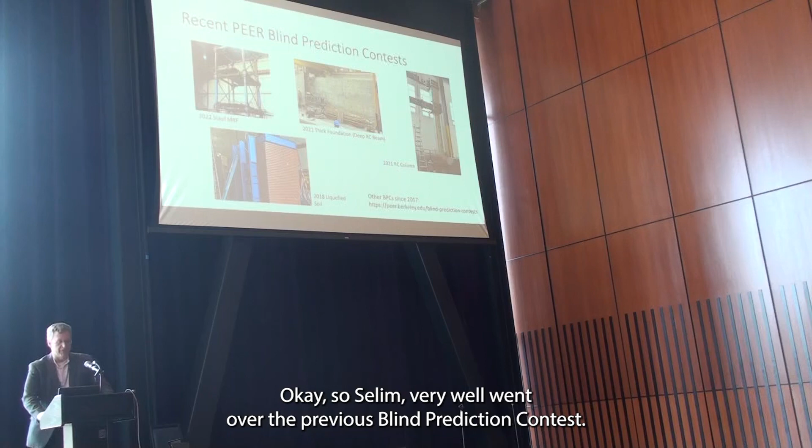But do a blind prediction contest for wave loading on a steel frame structure. Okay, so Selim very well went over the previous blind prediction contests. I don't need to reiterate those, but PEER has a long history of these types of contests.

But also in 2014, PEER held a tsunami modeling workshop at OSU, not as a blind prediction, but as just, here's some data from some experiments, how well can we use current methods to predict wave loading on a bridge deck. And this is from tests conducted in Japan at PWRI, and was part of PEER's tsunami research program. Okay, so all the participants are there, a lot of familiar faces, might be kind of hard to see.

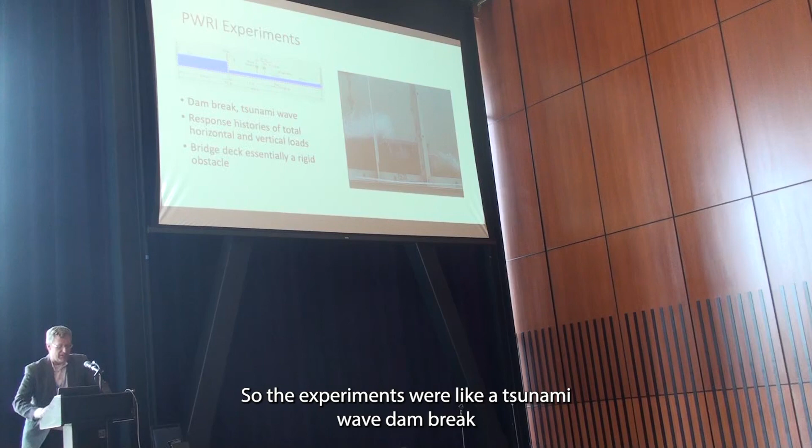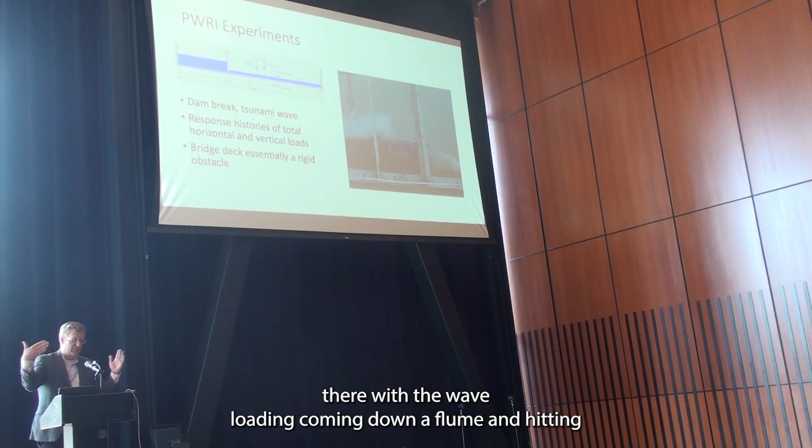Okay, so the experiments were like a tsunami wave dam break onto a 1 to 20 scale model of a bridge deck. Again, might be a little hard to see, but that's from the experiments there with wave loading, coming down a flume, and hitting a bridge deck. Okay, but the bridge deck was essentially a rigid obstacle. So it was all CFD. We asked people to determine the response histories of total horizontal and total vertical loads acting on the bridge deck.

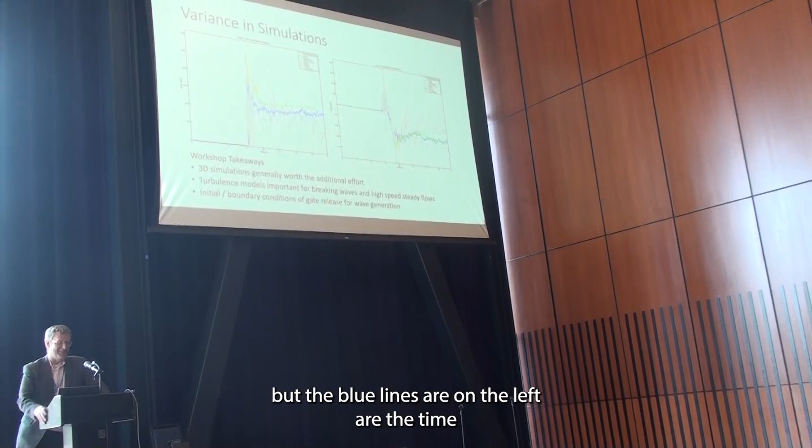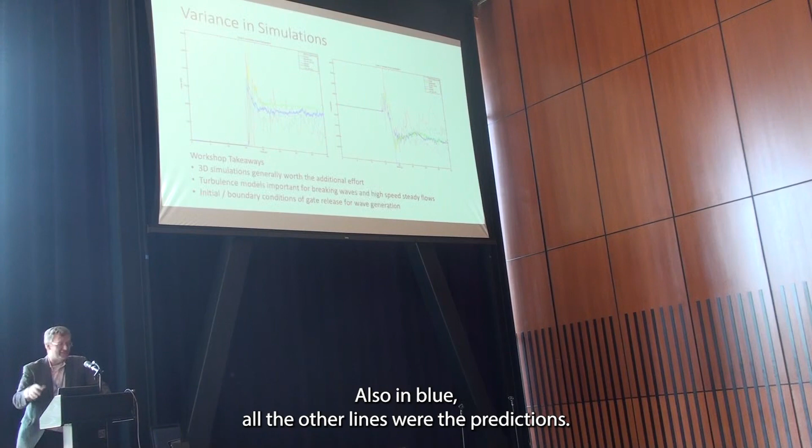Okay, and again, maybe a little hard to see, but the blue lines on the left are the time histories of total horizontal force from the experiment, and on the right is the total vertical force from the experiment, also in blue. All the other lines were the predictions. All right. And there were various softwares used. I know you can't read that. I can barely read it on this screen.

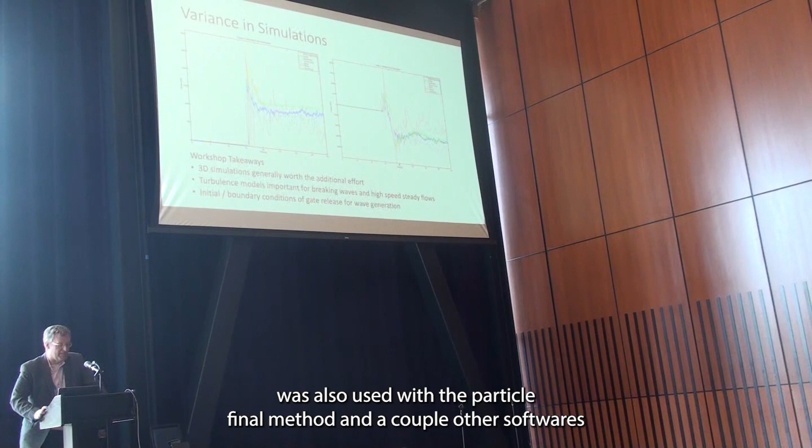But from what I remember, there's LS-DYNA, OpenFOAM, a couple of entries with OpenFOAM, STAR-CCM, OpenSees was also used with the particle finite element method, and a couple other softwares that I forget and I can't read on the screen there.

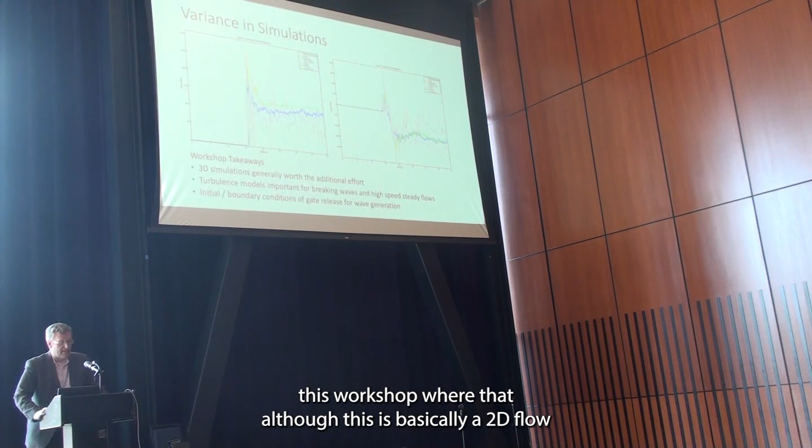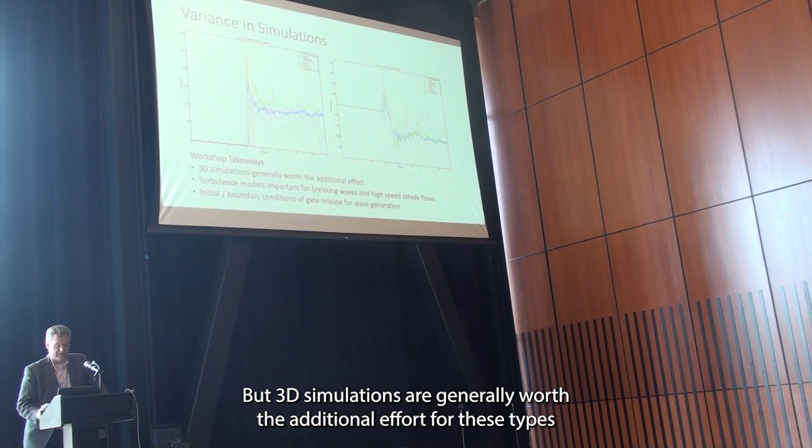Okay, Selim went over some of the takeaways from previous blind prediction contests, but some of the takeaways from this workshop were that, although this was basically a 2D flow, or 1D flow, 2D model, however you want to define it, 3D simulations are generally worth the additional effort for these types of wave loading problems. Even though they seem to be inherently 2D, there's some localized flow and turbulence that 3D can capture.

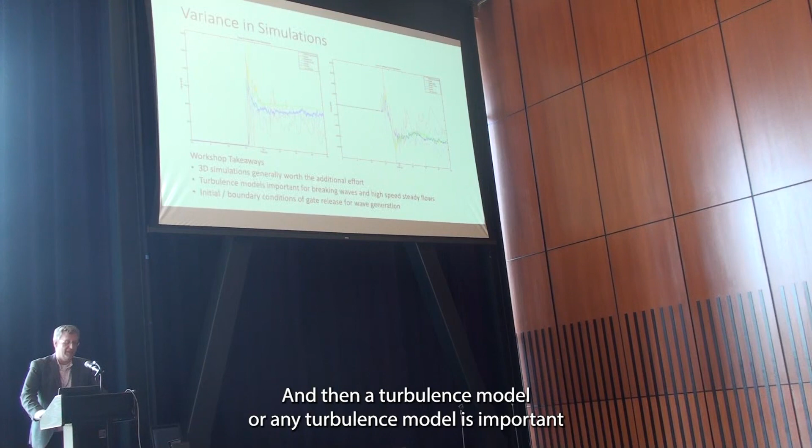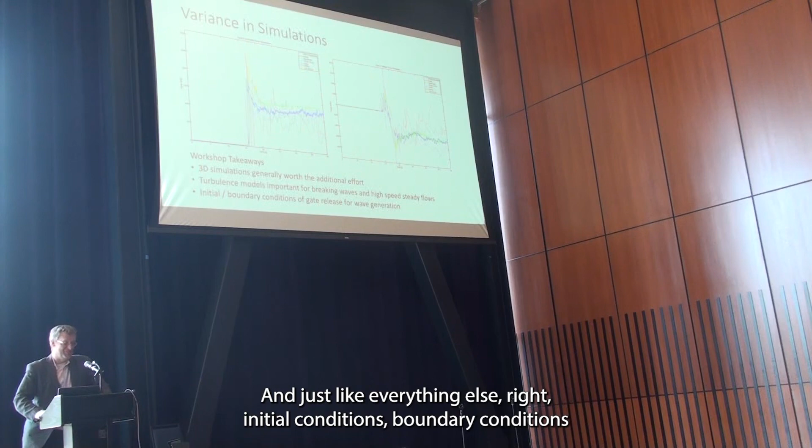And then a turbulence model, or any turbulence model, was important for breaking waves and high-speed, steady flows. And just like everything else, initial conditions, boundary conditions of the gate release or the wave generation were very important. That's like every simulation, right? It's the initial and boundary conditions, right?

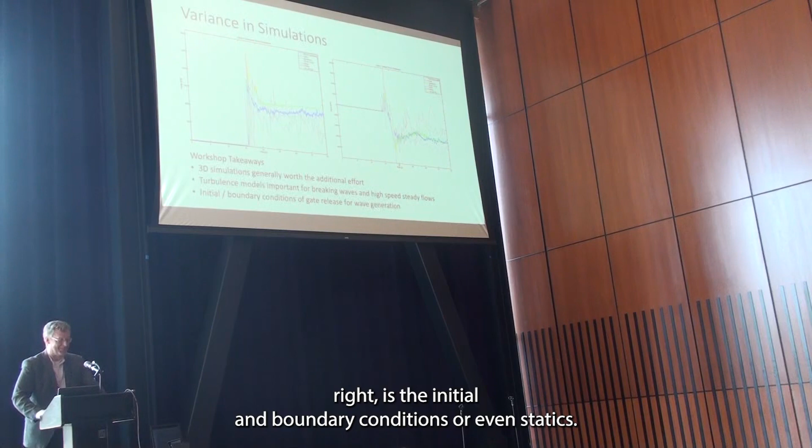Even statics, right? Okay, so fast forward, well, actually 1 year later, some steel frame experiments were conducted at OSU in the large wave flume, which Pedro Lomonaco will talk about tomorrow morning. You'll get more information, so I won't describe that today. But these are tests conducted by Dan Borello, who was at OSU at the time. He's since left OSU, doing pretty well. But he and Nick Wertheim conducted these tests with Pedro in the large wave flume.

It was a flexible steel frame model, and the objectives were to measure the dynamic properties of flexible inundated structures, and also measure the forced response of flexible structures to various wave conditions. Okay, and this will form the basis for the blind prediction contest that I'm proposing here. I don't have all the details worked out, so it's a little bit like when I teach structural design, the blind leading the blind, but also the blind telling you what the blind prediction is going to be. But I'll get the details worked out.

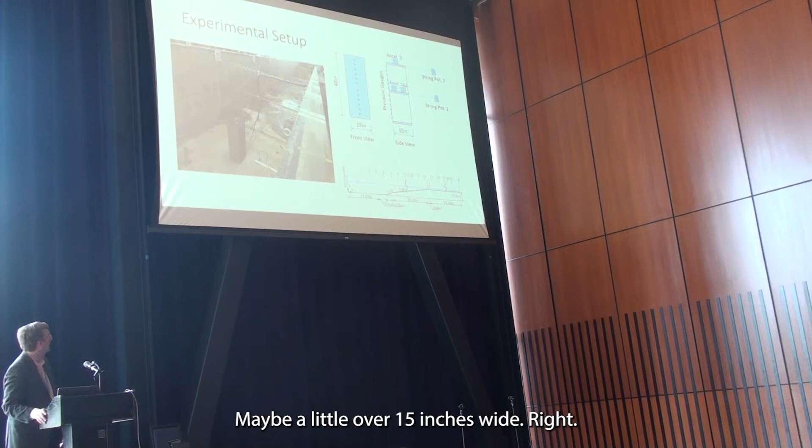But anyway, again, maybe kind of hard to see, but imagine this podium. It's about 4 feet tall, right? Maybe a little over 15 inches wide. But let's see. This pointer, no. Anyway, okay. Sorry. I'm going to blame this on the Mac, not user error, right? But anyway,

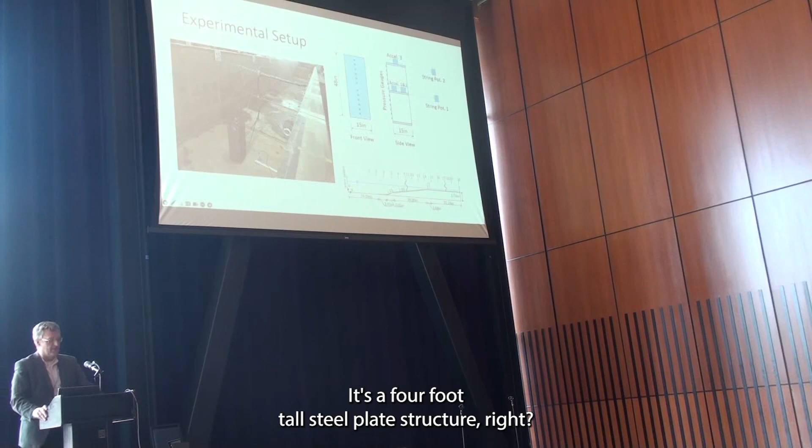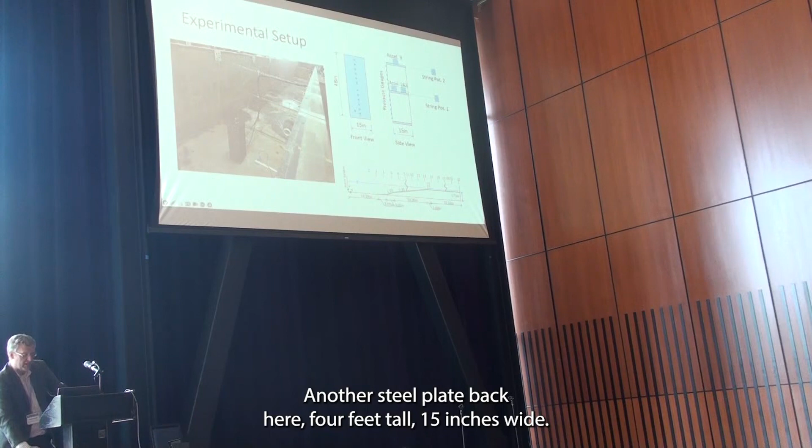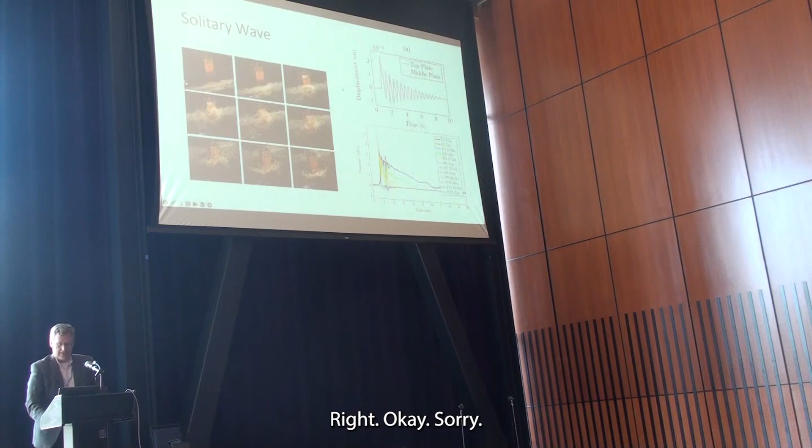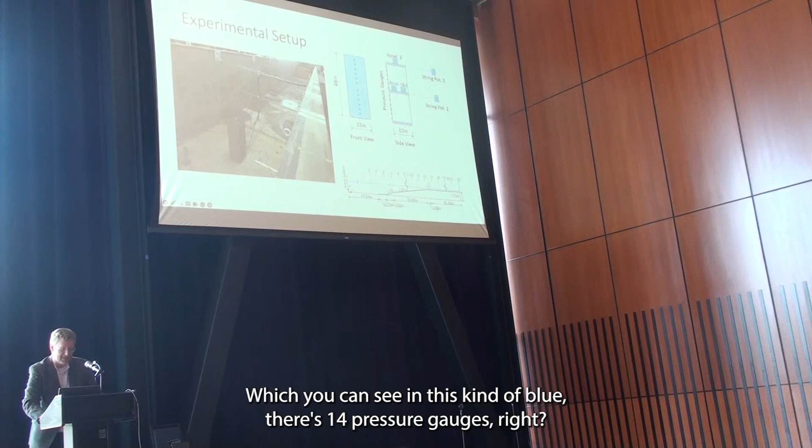Okay, so there's pressure gauges all along the front here, which you can see in this blue. There's 14 pressure gauges. And then from the side, there's accelerometers here to measure the dynamic response of each floor. And I believe there's some added mass, but it's not a big deal for this discussion.

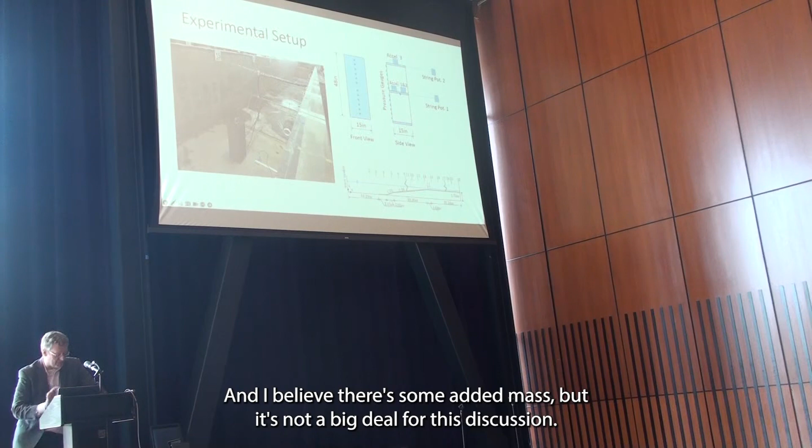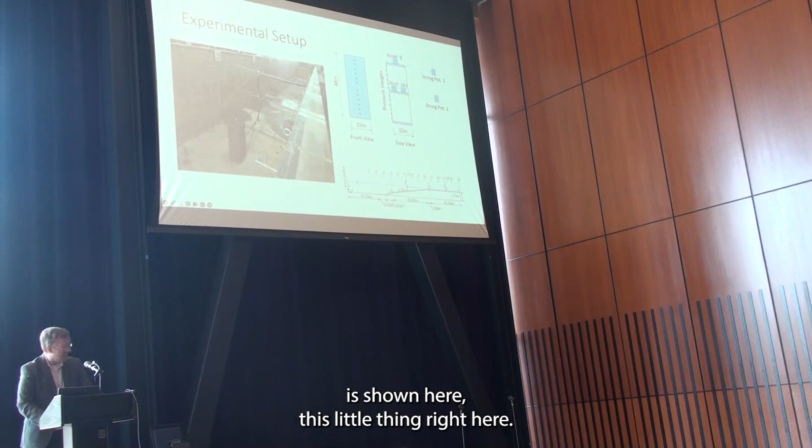Okay, so the profile of the large wave flume at OSU is shown here. This little thing right here, that's the frame. Everything else is fluid and beach.

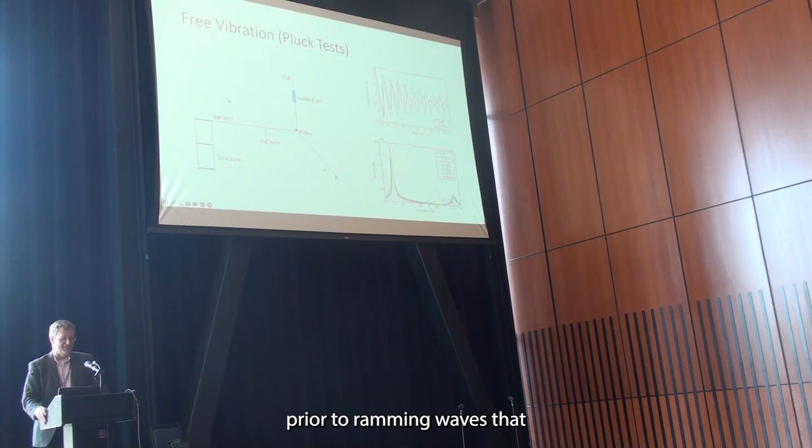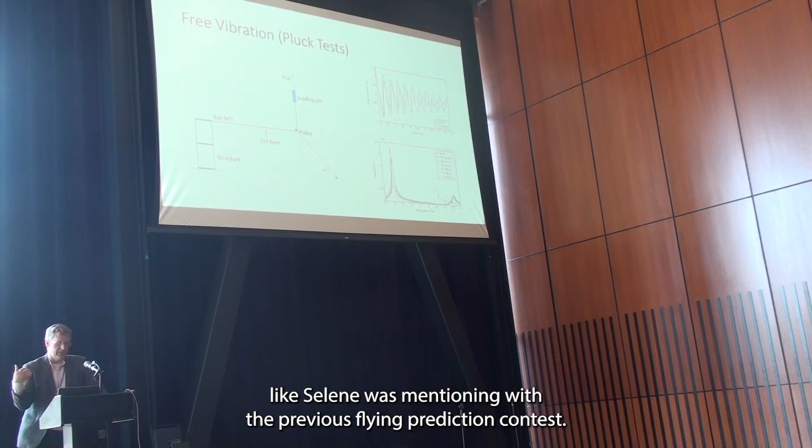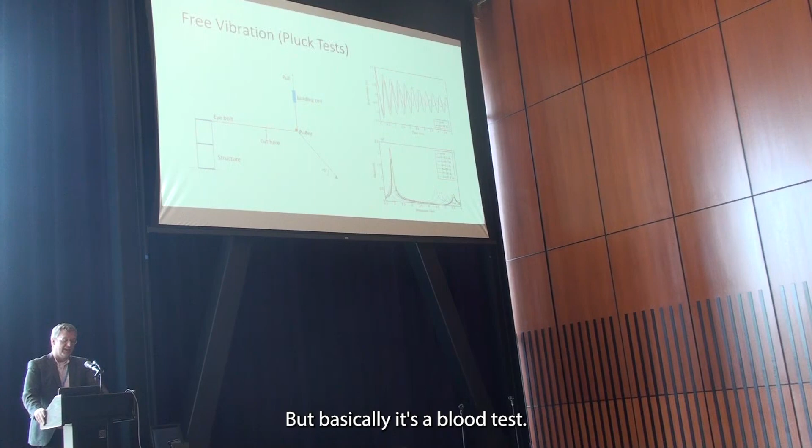What was done prior to running waves at this structure was free vibration tests. And we're going to give this data to the contestants so you can calibrate your models, just like Salim was mentioning with the previous blind prediction contest. So don't be trying to snap pictures of the time history to get a leg up in the competition, right? We're going to give you this data. But basically it's a pluck test. Again, statics problem, right?

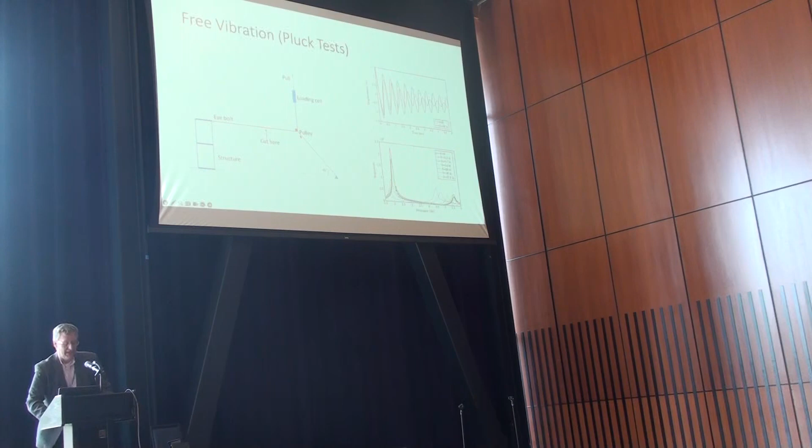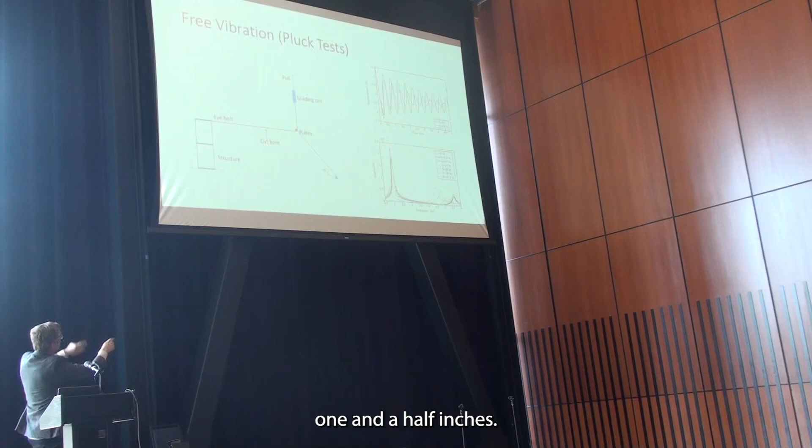That becomes a dynamics problem, but a pulley right here, and then a pin, classic Hibbeler, right? Okay, so basically, pull on the frame, get the frame to displace 1.5 inches, and then cut, and then let the thing vibrate, right?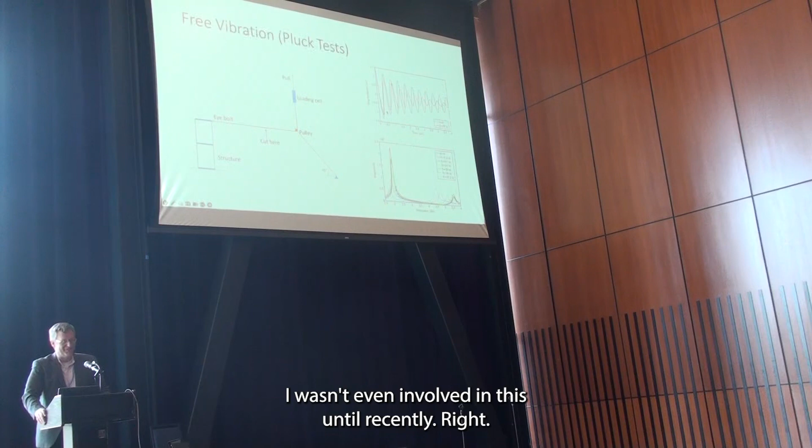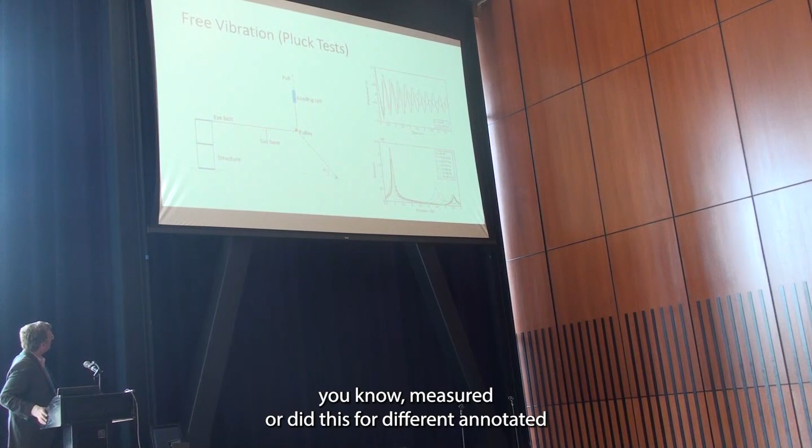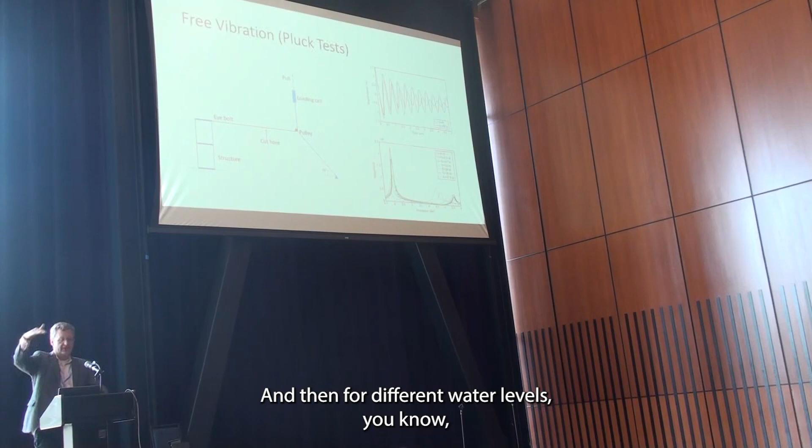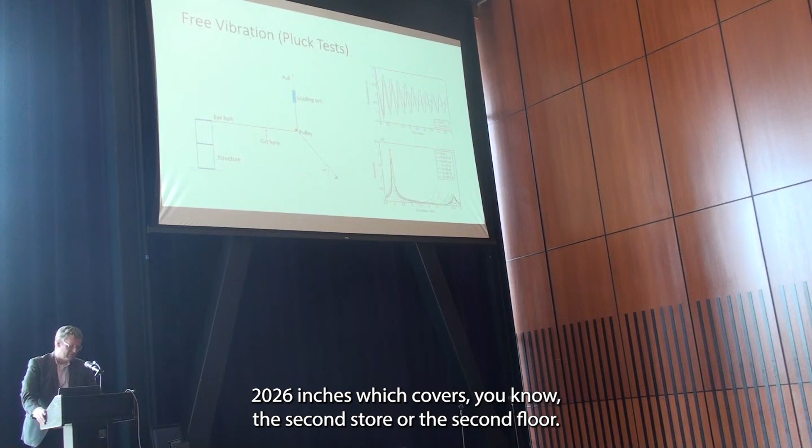But Dan and Nick and Pedro and students, they measured this for different inundated or standing water levels. So 0 water, free vibration, that's easy, that's dynamics, right? And then for different water levels, standing above or within the frame. I forget the exact, but 26 inches, which covers the second floor. It's 24 inches up to there. About 7 different water levels, measuring the free vibration response.

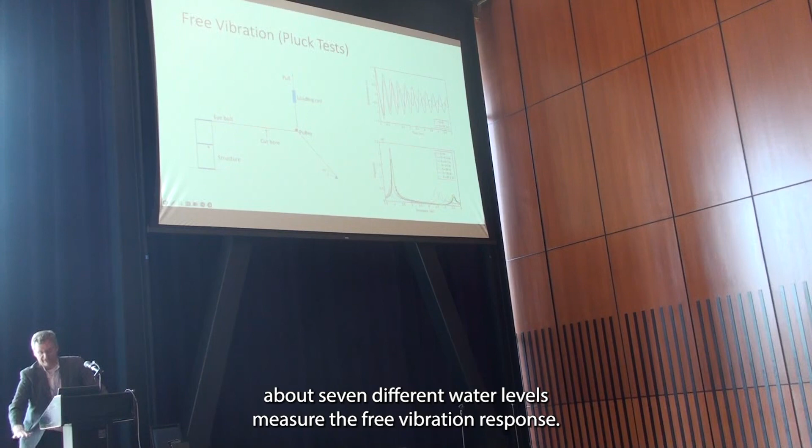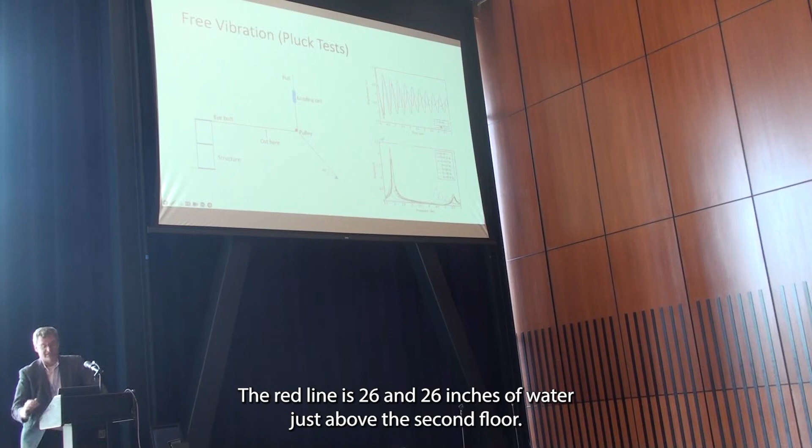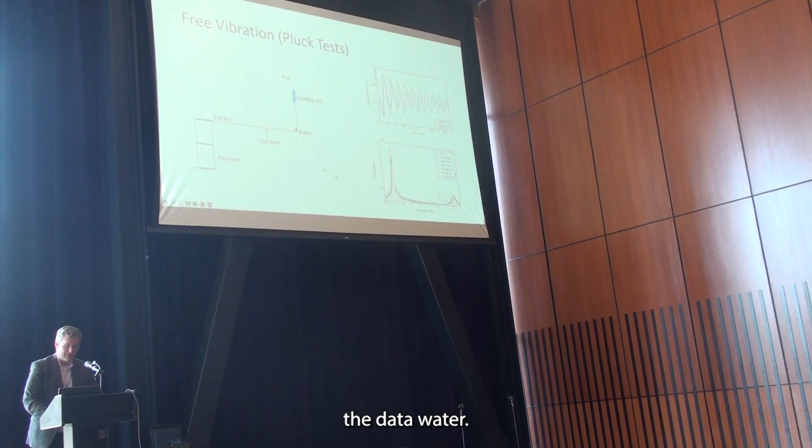And you can see here in the upper right that the black line is no water, the red line is 26 inches of water, just above the second floor. So you can definitely see there's damping, some effect of the inundated water. And then down here is frequency response to measure the frequencies. You can see the higher mode moves things to the left.

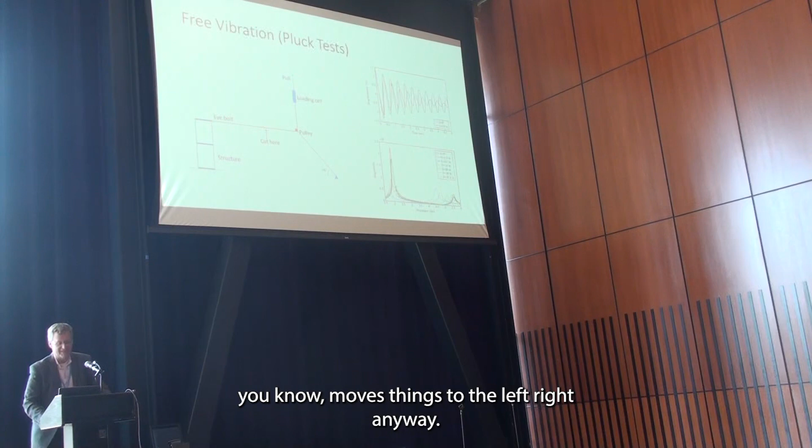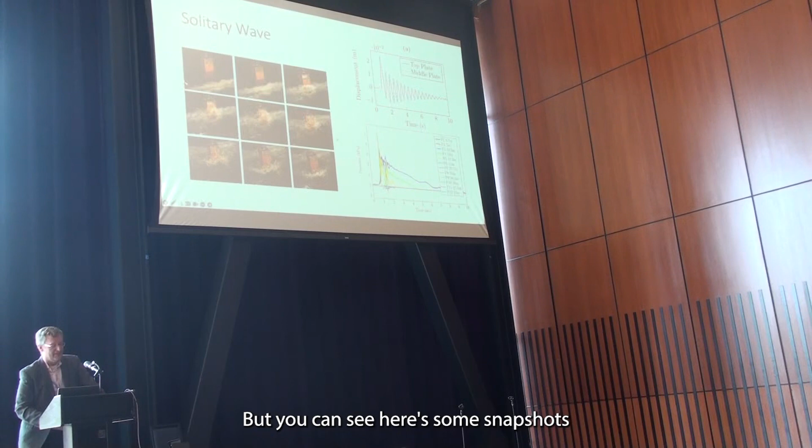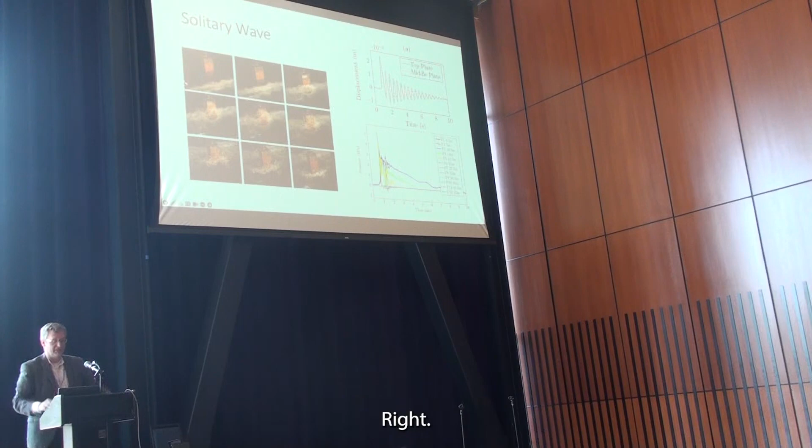Okay, and then solitary waves were the next thing, and this is also data that we plan to give. Here's some snapshots from the other side of the flume, looking at the frame, the wave approaching, impact. And you can definitely see that there's some 3D effects going on. So although you could model this in 2D, I think to get a good prediction, you need 3D.

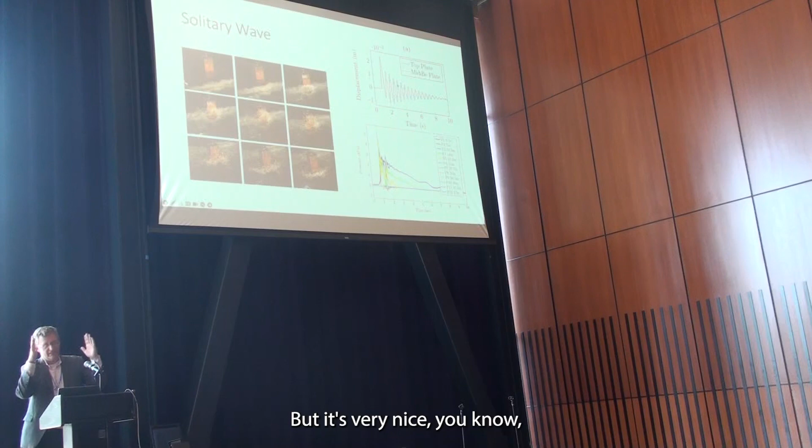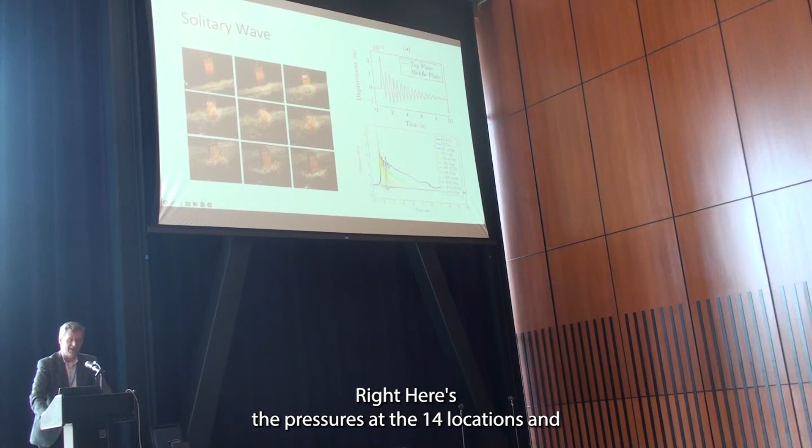Here's the displacement response of the top plate and the middle plate, the roof and the second floor, so to speak. It's very nice: impact loading, damped free vibration. Here's the pressures measured at the 14 locations. We're going to give this data, so no need to furiously take pictures. So that's the open prediction phase that we're planning.

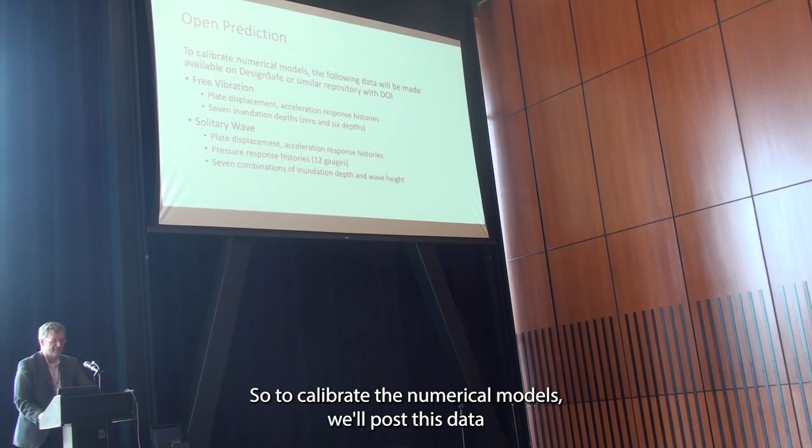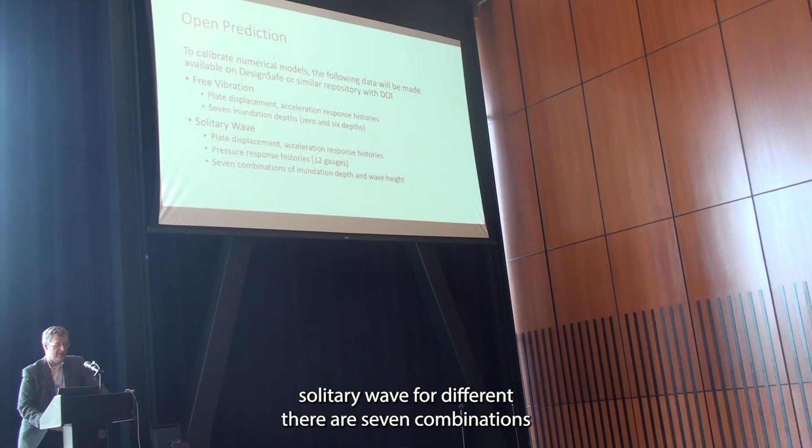To calibrate the numerical models, we'll post this data probably on DesignSafe or somewhere that's DOI-able. Free vibration for 7 different water levels, solitary wave for 7 combinations of inundation depth and predicted wave height. And then for the closed or blind prediction, submissions should predict the responses for regular waves.

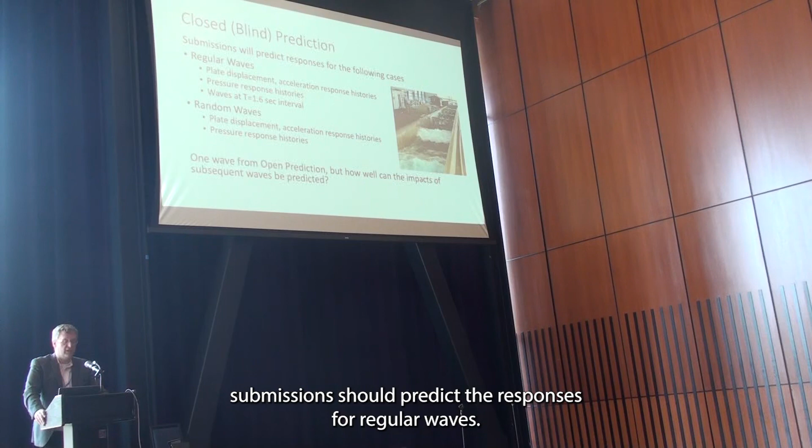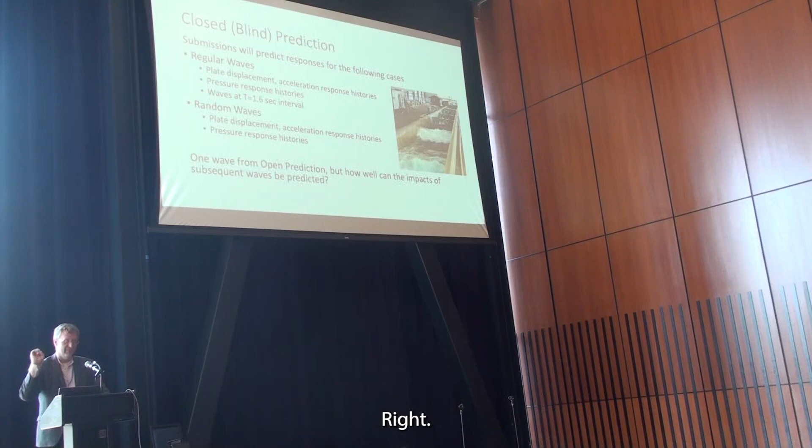This is where they started running regular waves every 1.6 seconds, I believe, at the frame, and measuring the response as they keep impacting, like a storm wave, periodically plucking the frame. And also random waves, spaced out randomly in time. So if you can do one wave from the open prediction, the question is how well can the impacts of subsequent waves be predicted?

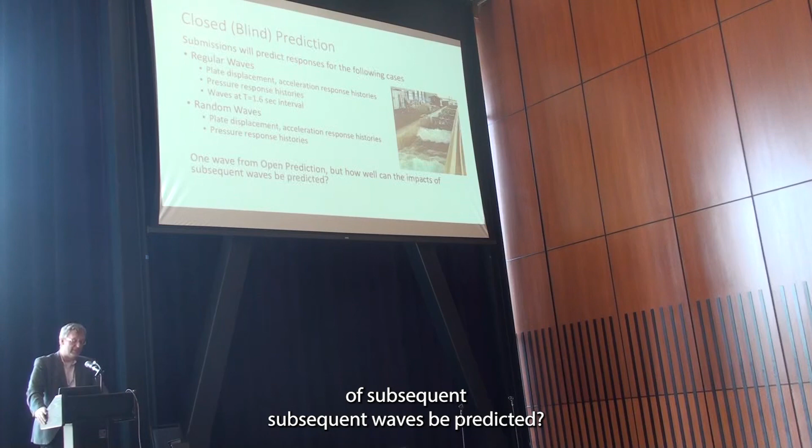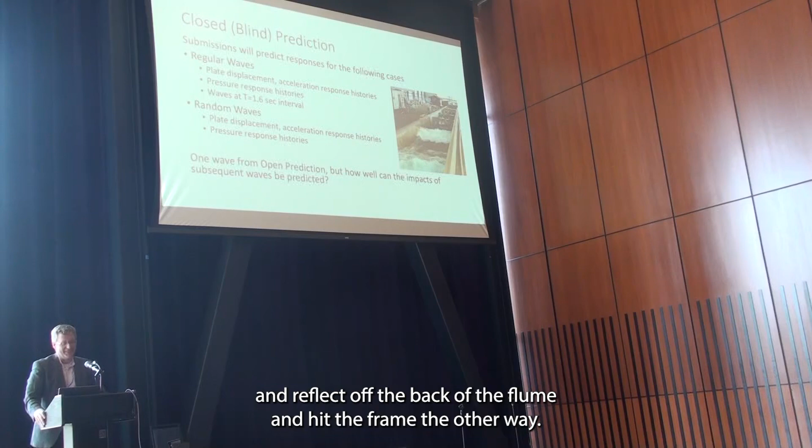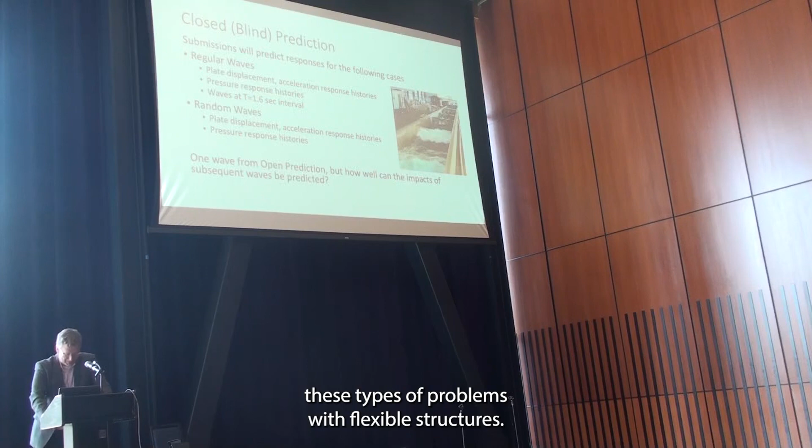These regular and random waves ran long enough for waves to reflect off the back of the flume and hit the frame the other way. So I don't think this is going to be easy, but I would love to see what people are able to do, as would Pierre and everybody else in the room. I think there's a lot of software for these problems with flexible structures. Definitely OpenFOAM or foam-extend, OpenSees, which has PFEM and flexible structures, as well as LS-DYNA, Abaqus. Any of those should be able to simulate this type of experiment.

So of course details remain, but tentatively, I'll work with Salim and Pierre to iron out the details and dates, but by the end of this year we hope to have the contest website open and data available for the open prediction through a referenceable DOI. Summer next year-ish, submissions will be due, September or later. By the next annual meeting, which I believe will be January of 2025, the winners will be announced. We want to look at how well submissions can predict the free vibration and the solitary waves.

Let's say that's 25% of the score. This is all subject to change, like a syllabus. And then closed prediction, maybe 50%, and then the details, clarity, reproducibility of a report would be another 25%, so there's some transparency in what you did and how well you can explain it. But it's all subject to change. So that's it.